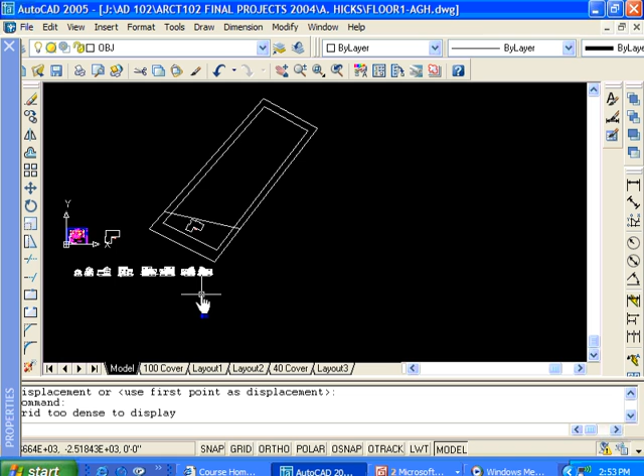Now that we have our lot placed or drawn, we also have the house outlined on the lot. If you remember, this right here is a high water mark, high water line that goes across the lot, so that's why we placed the home in the upper portion, the higher portion of the lot.

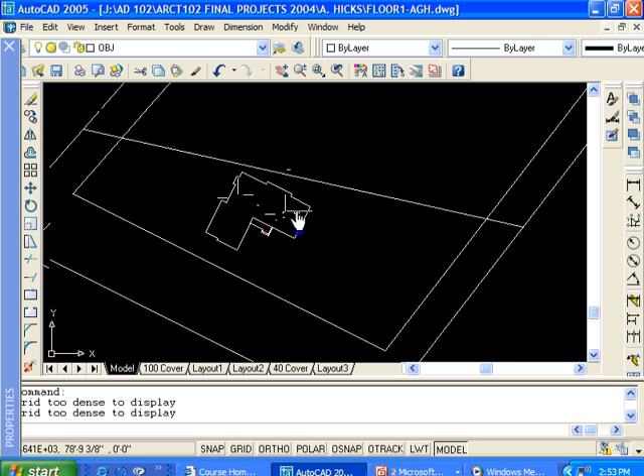Again, there's a lot of flexibility in the exact location of this home on the lot. We can put it all the way to the west, all the way to the east. We can put it a little closer, a little further away to that setback line. That really is the preference of the homeowner.

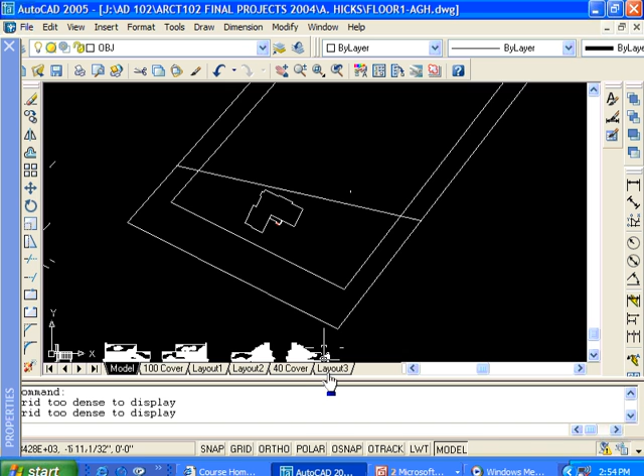So now what we want to do is take a look at the cover sheet and at least take a preliminary look at how that's going to look. I'm going to go to basically a blank layout, and I'm going to rename this, and call it cover sheet.

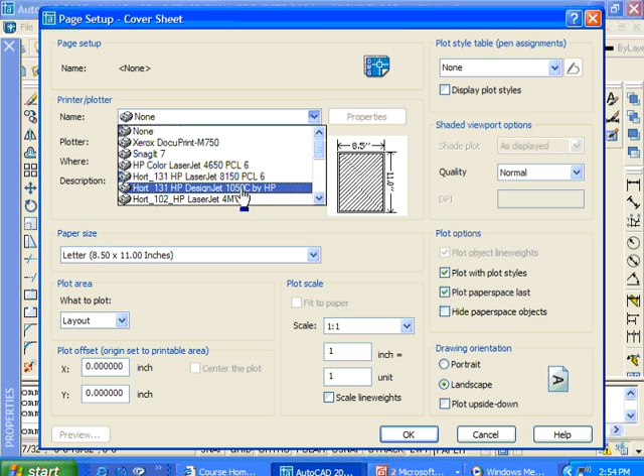Okay, and then I want to go to the page setup manager and modify it. In my case, the plotter that I'm going to send it to will be the HP DesignJet 1050C. It's going to be 11 by 17 piece of paper, and I like to use an oversize whenever I can. Some plotters have that, some plotters don't. And I guess I'll take a preview, but that's fine, and it is okay.

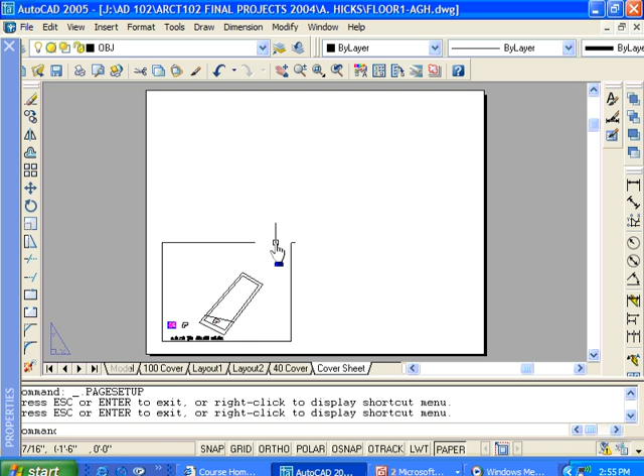So what we're going to have is this lot right here in one viewport, and I'm going to place it right over here, or here, I guess that would be fine too. I'm going to put an elevation up here, and I'm going to put an index right here. So I'll put the lot over here, the index over here, so it'll be nice and easy to see on the right-hand side, and an elevation up here.

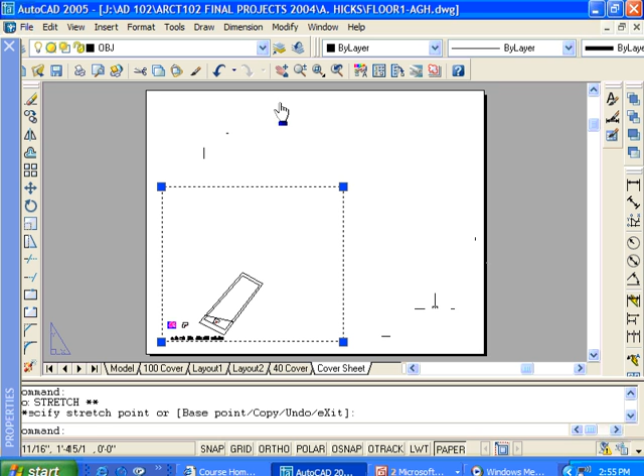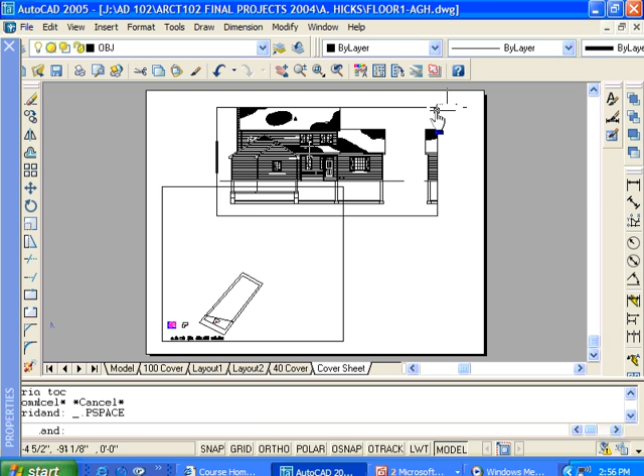The elevation is really not to scale. So I'm going to make another viewport right here, go inside model space, and I'm going to zoom in on a front elevation right there. Make sure that we can see it all.

I am eventually going to freeze the layer that has the foundation in it. Then, the text over here, by the way, is going to be done in right out in paper space, so that we don't have to worry about that.

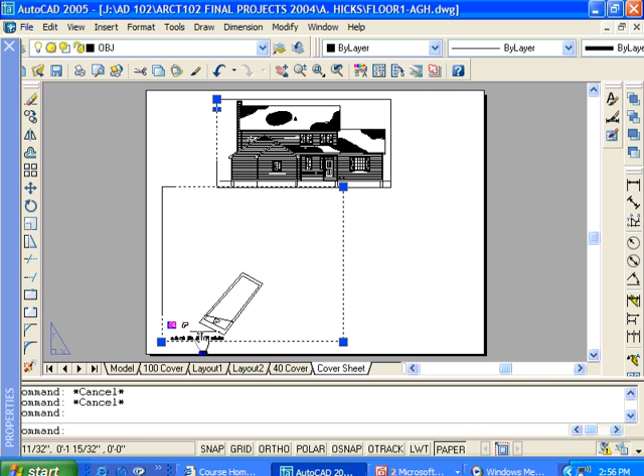And this lot, I'm going to walk through the process here just so that you can see the problems that exist, keeping in mind that this is probably 5 to 10 times larger than any lot that you may generally see in a city.

Keeping that in mind, I'm going to still go and size this. So I'm going to highlight that viewport, go to properties by right-clicking, and I'm going to size this. Now we go to standard scale, and we have all of these mechanical type scales, and all of these architectural type scales. One thing that we don't have real handy are the civil type scales.

This is likely, at least possibly, the first time that you've dealt with civil engineering type scales, but the common scales there are 1 inch equals 10 feet, 1 inch equals 20 feet, 1 inch equals 50 feet, 1 inch equals 40 feet, 1 inch equals 100 feet, and 1,000 feet. So those are the common civil engineering scales. We don't see those here.

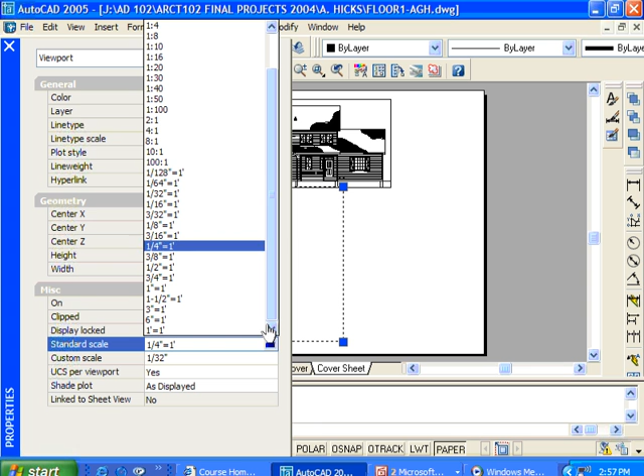So I'm just going to show you something. And we take 1/4 inch equals 1 foot. I guess that's not a good example. I'm just going to go back to where it defaults 1 to 1, and kind of explain this. What we'd love to do is have this plot plan scaled at 1 inch equals 40 feet, or maybe 1 inch equals 50 feet.

Let's say 1 inch equals 50 feet. So what we're going to do is say, okay, how many 1 inch increments are there in 50 feet? Well, there are 12 inches in 1 foot. 12 times 50 is 600. So what we want to put here is 1 over 600, and so we're going to plot it at 1/600th size.

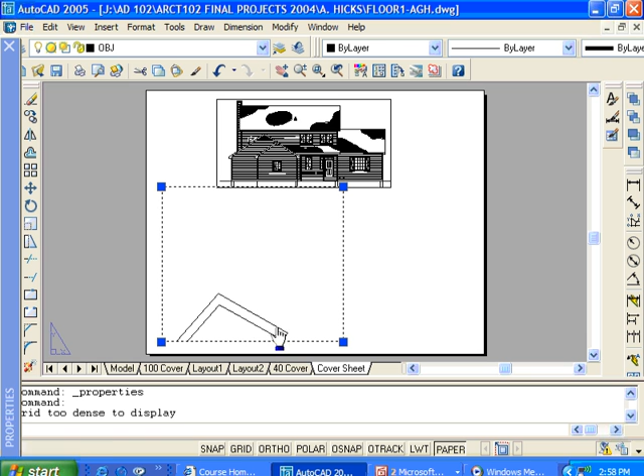And so now there we have that, and I'm going to pan inside this. So here is our little problem. We have a viewport, let me see, I'll make it visible. There is our lot. It is huge. So we have a couple of choices here.

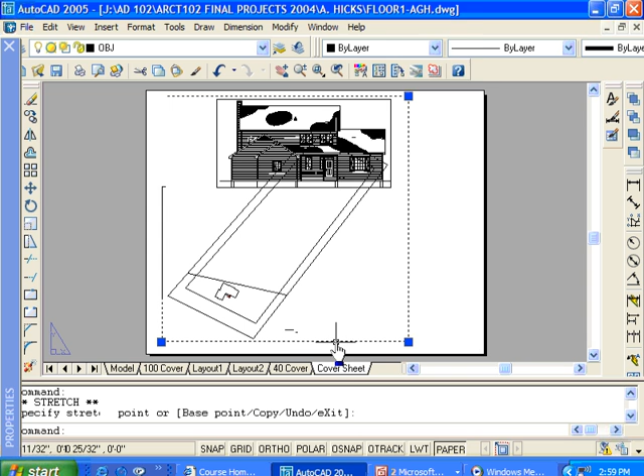One would be to scale it all the way back to 1 inch equals 100 feet. And let's take a look at that. So we go to properties. And by the way, notice it defaulted back to 0 because that fraction was so small, it defaulted back to 0. So 1 inch equals 100 feet would be 1 over 1,200.

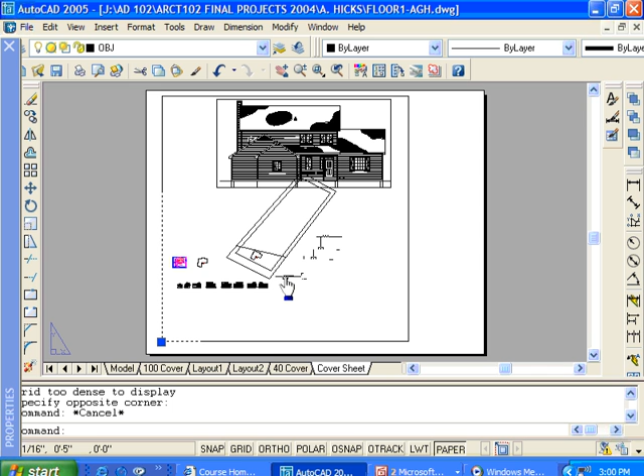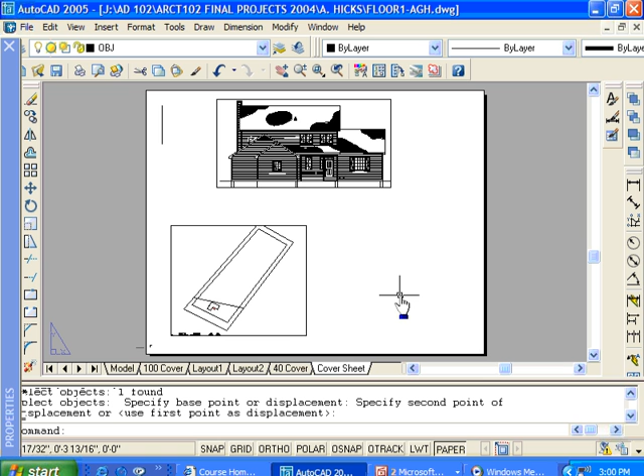So now we can see that it is small enough, but that is going to be so small. Just make sure that we understand exactly what we're dealing with here. That is going to be so small that we won't be able to dimension it. We have some notes and dimensions that we want to put on there. The house is probably 50 feet wide, so the house itself is going to be a half inch wide when it's plotted. Just imagine that. That's going to be so small.

So I'm going to actually just undo that and get back to that larger scale. Here's what I'm going to suggest, that you can see that really the important part right here is back in the towards the riverside, and up here is the real important part where we're actually putting the house. So I'm going to basically break out some of this stuff that we don't have any use for.

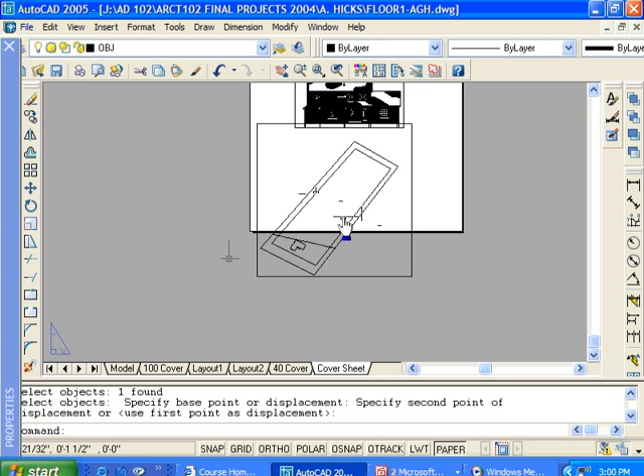With this lot being set kind of kittywampus, it's kind of going up at a 30-degree angle. It would be nice if it was vertical. So I'm going to go back to model space for a moment.

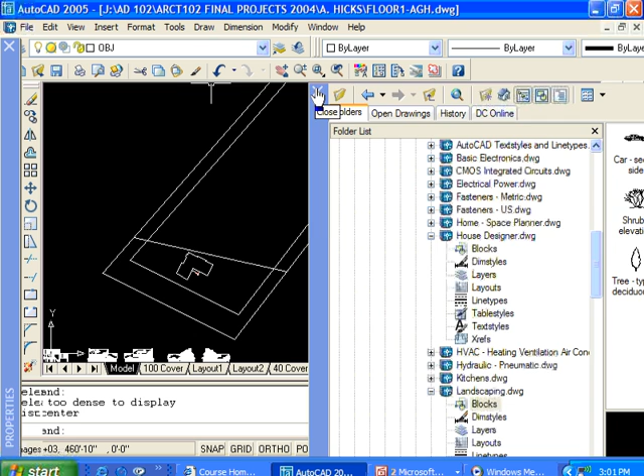I'm going to insert, I don't think it's going to show up very well here. I'm just going to show you in Design Center, right here, this icon. We can click on that and go to the House Designer, actually landscape drawings. Under the landscape blocks, there is a north symbol. Now you can create your own if you want, but that is a nice north symbol. I've already downloaded it, so I have that available to me, and it's called the north symbol.

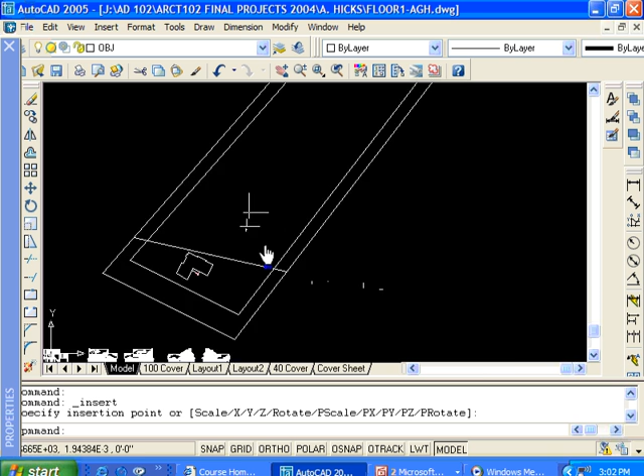I'm going to see if it's that one. Okay, this is actually not it. That one works also, but the one that is in the design center looks a little bit different. By the way, again, that one would be just fine. Insert block. The other one is called North Arrow.

And I'll copy there, pop that in right there. You can see it's so small. I'm going to scale it up, let's say 12 times, I don't know how. Scale. Might be pretty good right there. I'm just going to move that down here for now. We'll move it into position in a little bit.

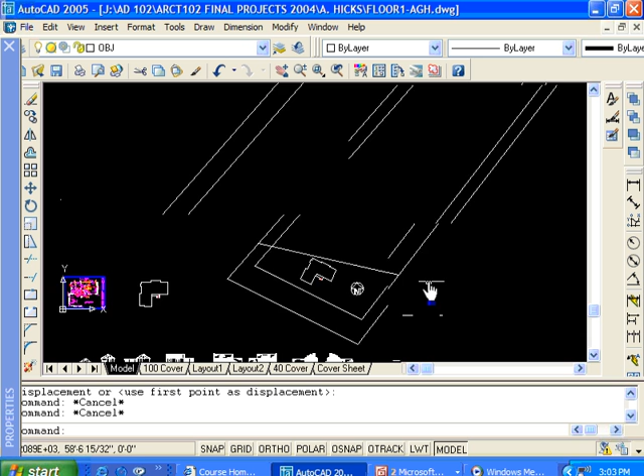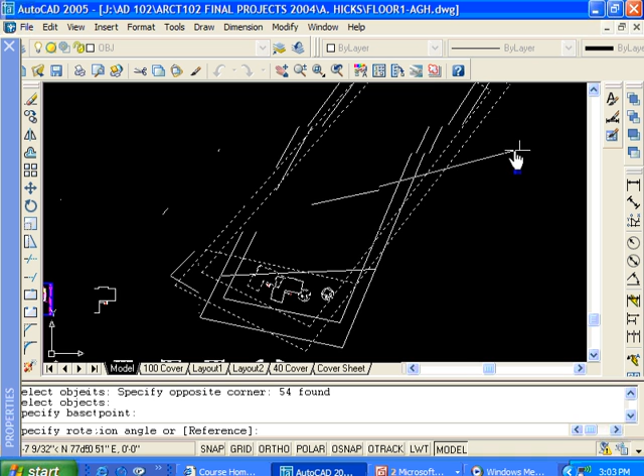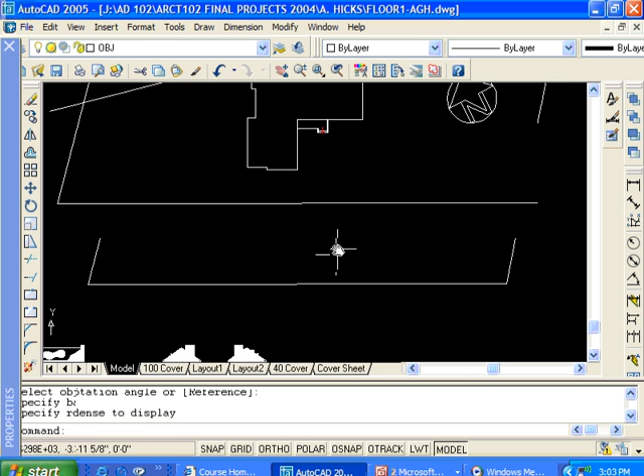But I wanted to do this. I wanted to put that north symbol in right now because this is what I'm going to do. By eye, I'm going to rotate the entire lot. But I wanted that north symbol in there so I don't get that out of whack here. So I'm just by eye going to rotate this, and it really doesn't matter a whole lot because we're going to actually note and put in here the bearing and the lengths. So it's not going to be critical that I get it rotated exactly to the right degree. But notice that this north symbol rotated obviously with the lot. That's what I wanted to accomplish there.

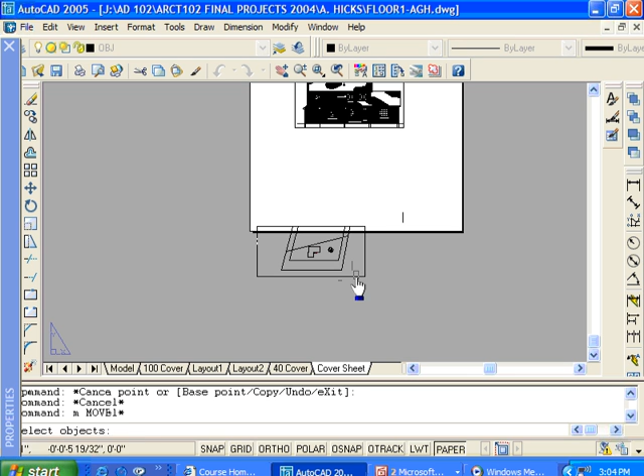So now I'm going to go back to my cover sheet and notice that it rotated just like we want it. And I'm going to grab that viewport right there, move it a little bit right up into place right there, and then instead of cutting another viewport right here and then zooming in, I'm just going to copy this. I'll put ortho on, although it's not critical right now. And then I'm going to go inside this viewport and pan.

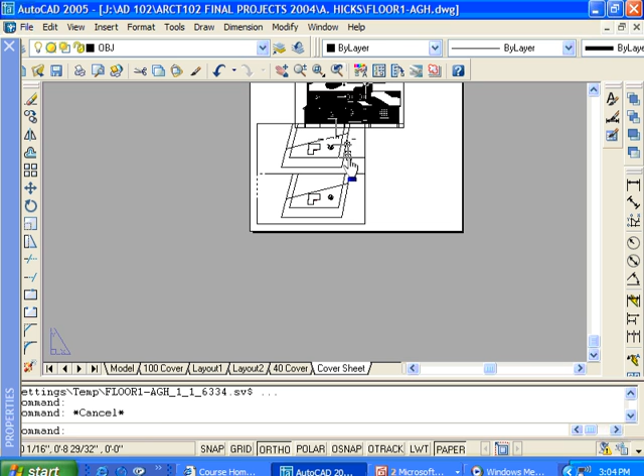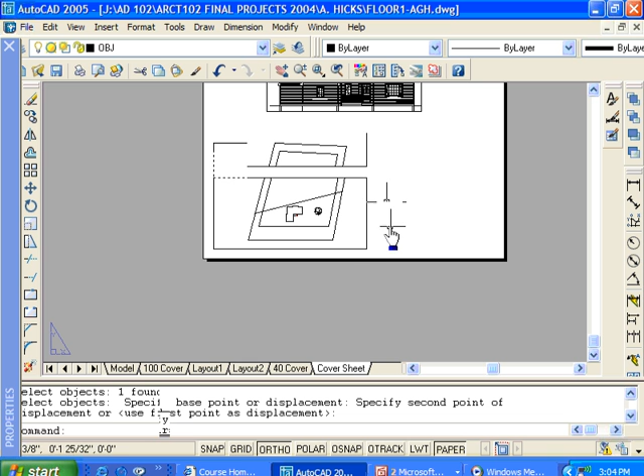Now I'm not expecting, and I'm not going to get these two to line up. It's not going to work that way because they're not at the portion that I cut out. They're not parallel. These two lines are not parallel, so these are not going to match up right here. The widths are not going to match up, and that I'm okay with that.

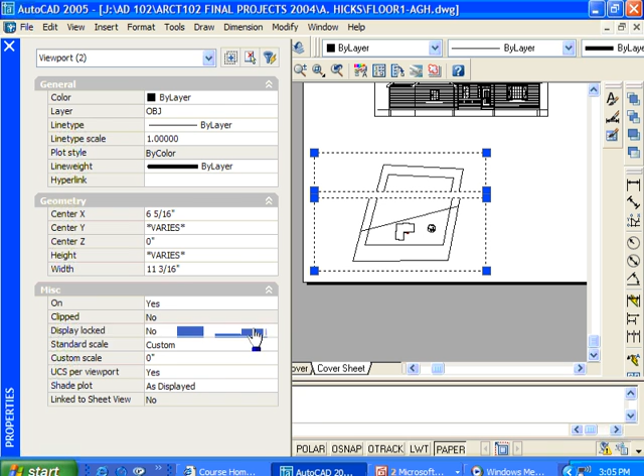So now I can play with these locations as much as I want to, and I can move the viewports. The one thing that I would do very soon is to make sure that the zoom factor is locked.

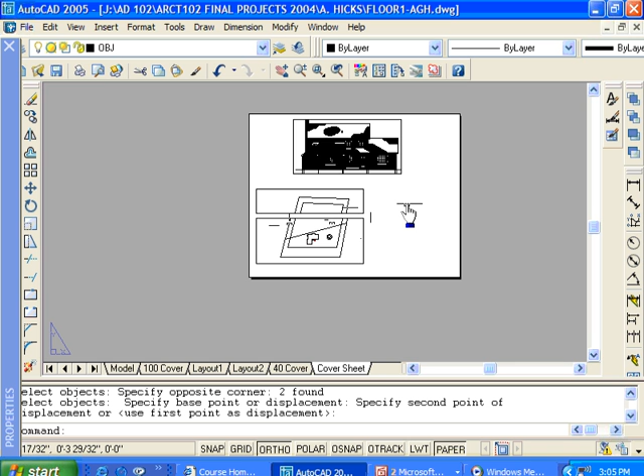So I don't, by accident, change the scale of either one of those. Now I'm just going to move that so just a little bit up into place there.

Okay, and then the last thing that I have is some of the index here. I'm going to give you a full list of the sheets, but the thing you want to do is take a look at the styles that are available and pick one that's appropriate. We want something nice, number one, easily read. We want something dark enough that it can be easily read, but simple enough that it's not confusing. We want it somewhat compatible to the feel of the structure. So find something that works well.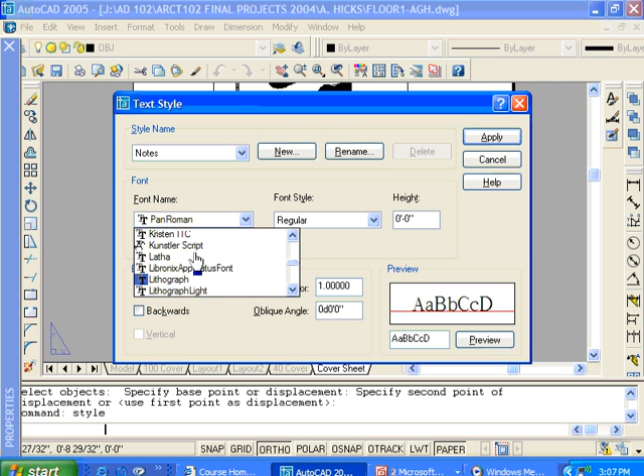I wish I had a real good suggestion right here. I don't. Arial is always kind of safe, but you know what, we can always change it. I'm gonna be a little bold here, I'm gonna try that. I'm going to create a new one with that lithograph, and I'm gonna call it index.

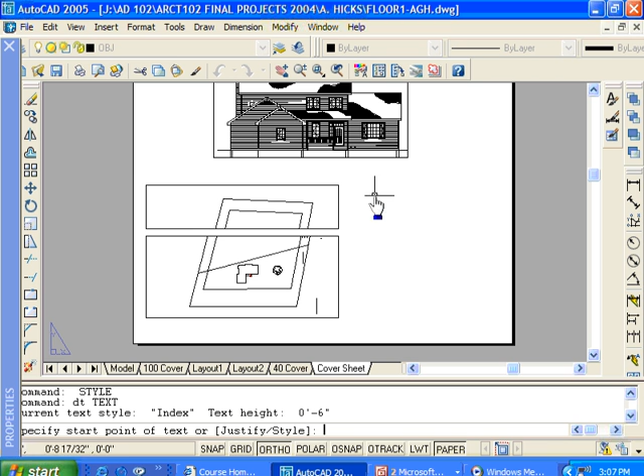Okay, and for the index we're going to do that, and I don't know that we need to have it bold, but that's fine. And close. So is that the... okay, so now I would go out here and go dtext, and for the height, I'm guessing that probably 3/8 of an inch, 0.375, and east is just fine.

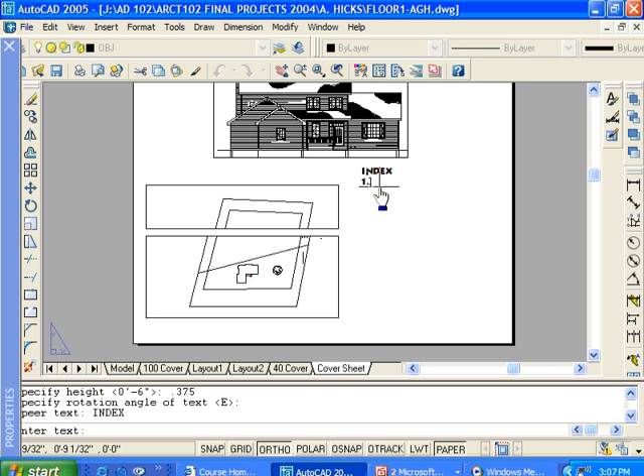And enter the text. First I'll just put these all in caps. Index. And I'll just say 1 space foundation plan, 2 space period space first floor plan, 3 second floor plan.

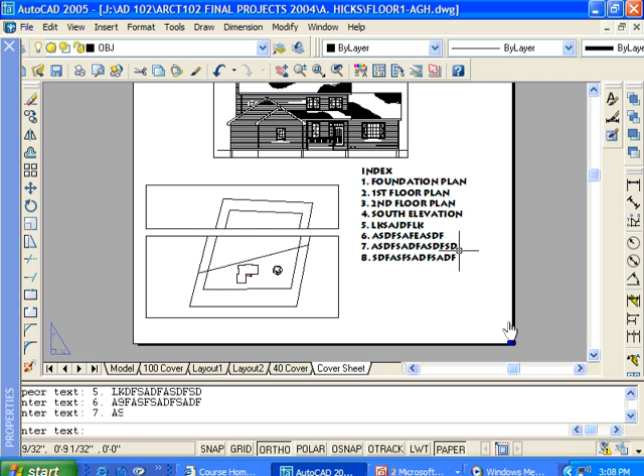And like I said, I will give you a list of these. I'm just going to put some... yeah, and we'll put a full list of the index names there. And then of course we would move all of these together so that we get a good balance.

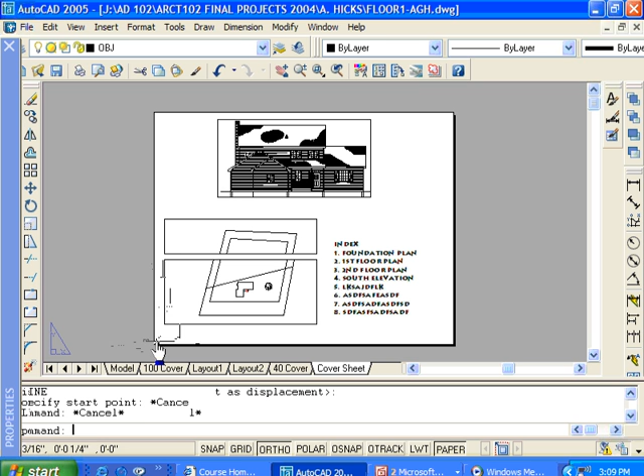The last thing I'm going to say, because this segment is already getting a little long, I'm going to do a polyline. We're not going to put a title block on this, but we are going to put a border on this. So first I want to draw a rectangle from 0,0 to 22,17. The unfortunate thing is you can't really see it because it's right on the paper edge here.

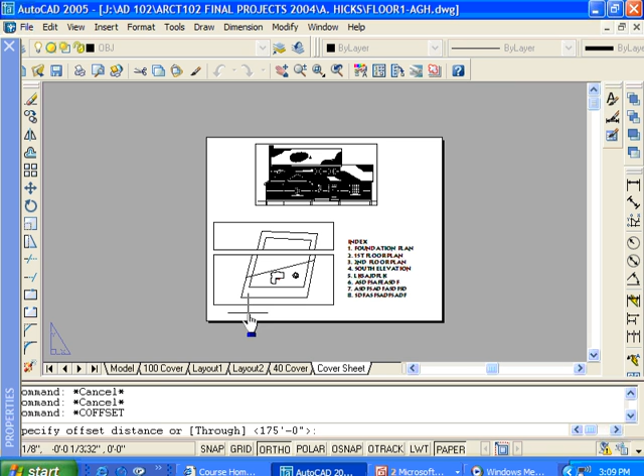And then I'm just going to offset that 1/2 inch. Okay, so that's good. And what I want to do is put a thickness on this at 1/32 inch. Okay, so I just want to make sure that we're okay. I'm going to highlight the thickness, you can see that there's some thickness there.

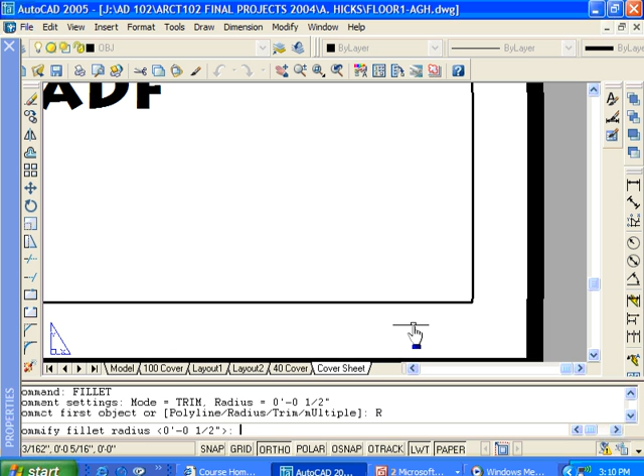And the last thing I'm going to do is fillet this. If the radius is not already set at 1/2 inch, do that, and I want a radius of 1/2 inch on the polyline. So P for polyline, and I'll pick that, and it does all of the corners at the same time.

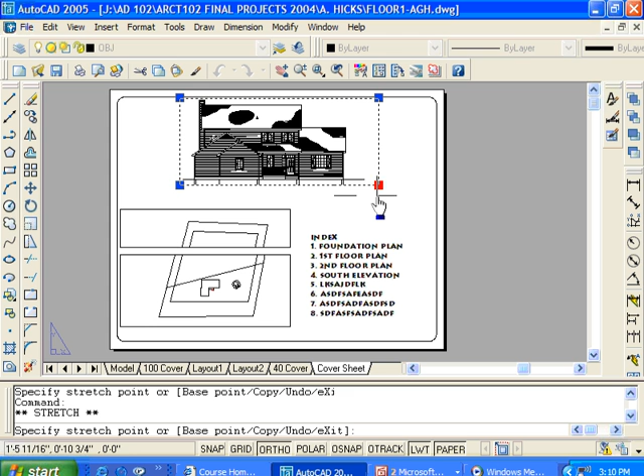And so we have our layout. The thing that's nice about the elevations is that we can size this any size that we want to. We can go in here and zoom in a little bit if we have a little bit more room, or zoom out a little bit if it gets too tight.

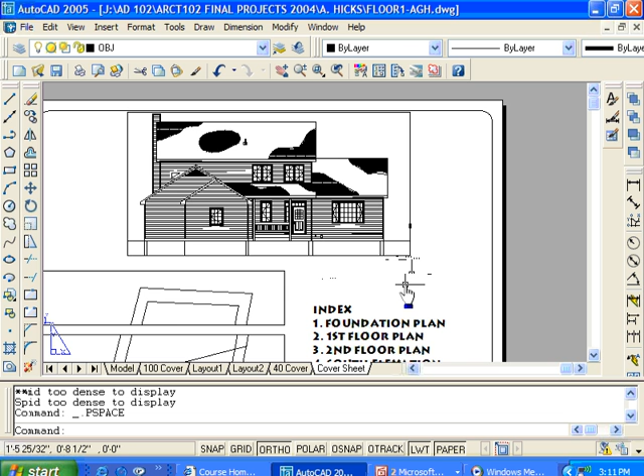The one thing is that we do want it at an appropriate size. Now what exactly is that? That can kind of be argued. Same thing goes for the text here. I would play around with that. Once I said okay, I'm going to start at 3/8 of an inch, I would look at that and play around with it a little bit, make sure it's the right size.

After I have my full list of sheets there, the one that needs to be to scale is the plot plan. We need to know what scale that is so that when we're putting the notes in there, if somebody uses this and needs to scale something, that information is right there.